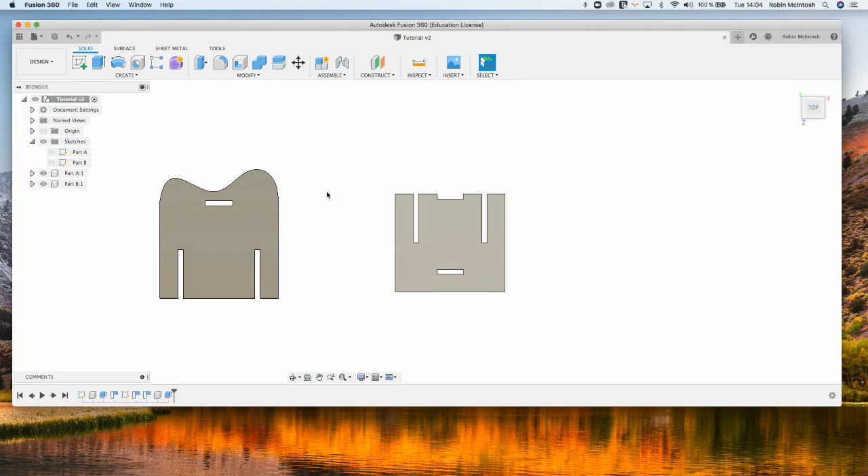So you can see here we've got part A and part B, nice and neat. We've just got two sketches that made the two parts, part A and B. If you hold down Shift on your keyboard and move two fingers on your trackpad, you can rotate this round. Now, when we look at these, hopefully you're able to see that this part here and that part there go together.

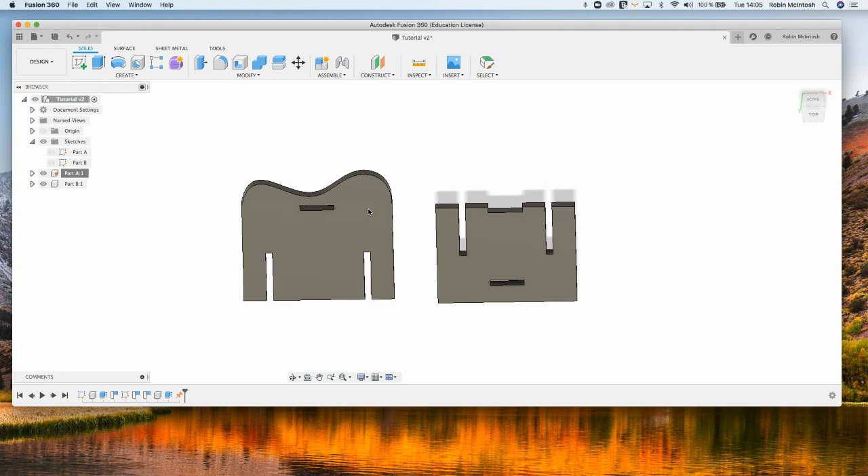So what I'm going to do is pick part A, secondary click on it, and ground that piece in space. So now I can't move that one when I click on it, but this one can still move. So we're going to move this one to join on top of there.

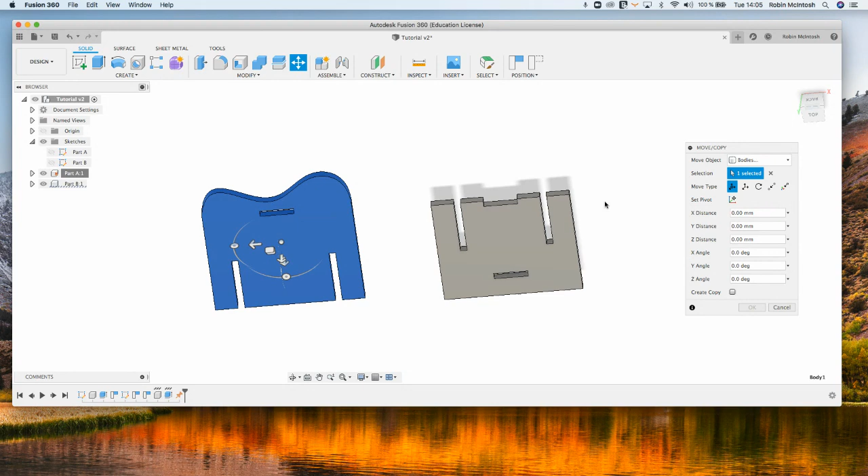Now, if you can't quite see how these are going to go together, we can rotate it so you get a better idea. So up here, we've got that move copy option. If I click on that and select this part, it's best if you select the middle. But you see, when we click on it, it's asking us to select a body, but this is no longer a body, it's a component. So we need to change that there to component and click on it again.

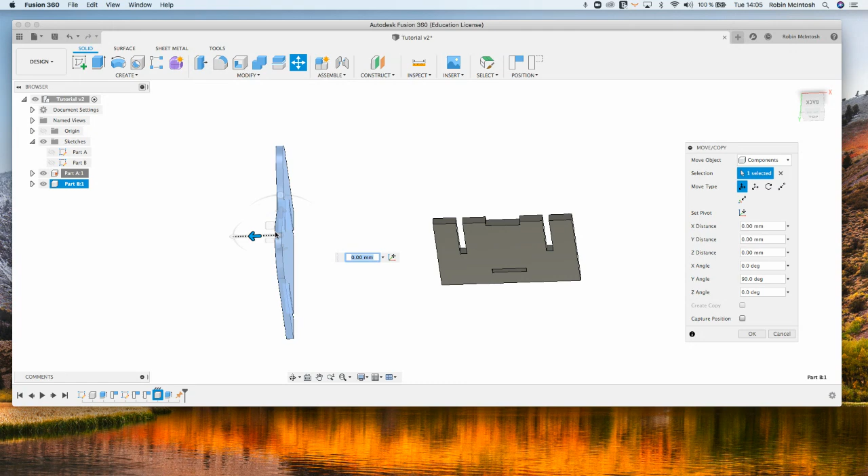So now you can see that there's these different arrows pointing with different rotations on them. This one here, I think, is the one we want. We're going to rotate that around 90 degrees and move it across a little bit. Now hopefully you can see, it's not the best angle, that this bit here is going to match up with that bit there.

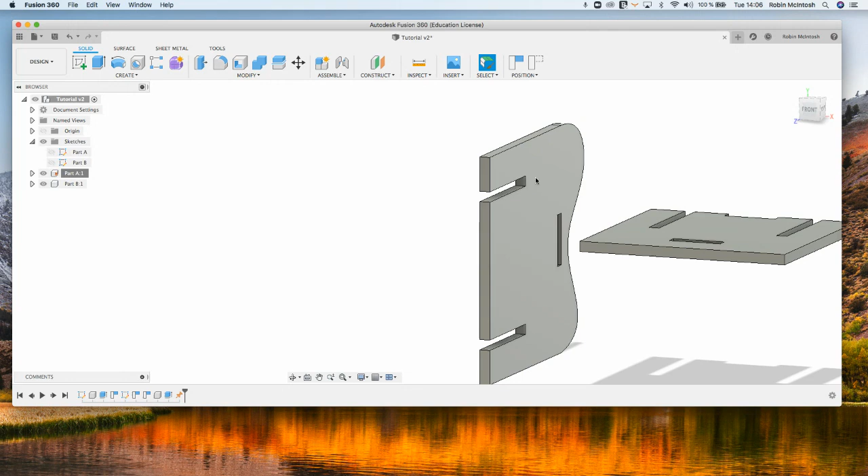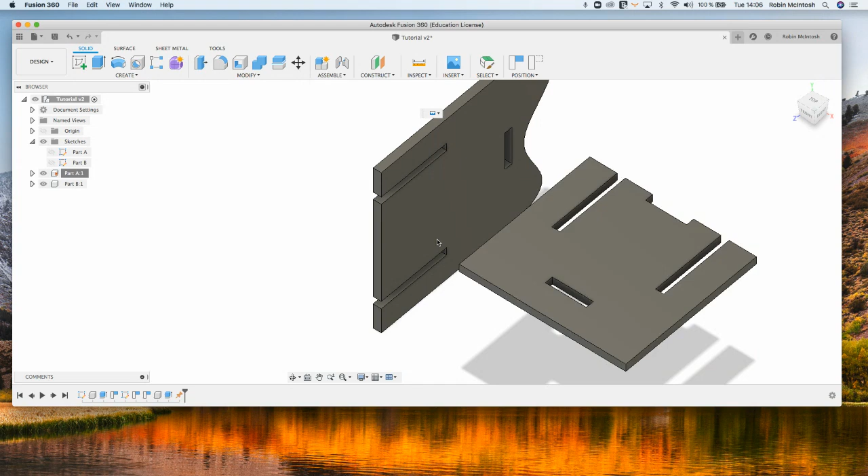Now there's many different ways that we can do this. Let me just change. I want to join the center of that square there with the center of that square there. So we're going to use the Assemble toolbar and we want to click on Joint. Now, I'm going to capture position, because if I hit continue, everything will move back to its original position where they were made. So capture position, and we've got this toolbar now.

Now you'll notice that part A has become transparent. That's because the first one you click on is the one that moves. And as this one's locked in space, we can't move it. So I'm going to rotate around a little bit more.

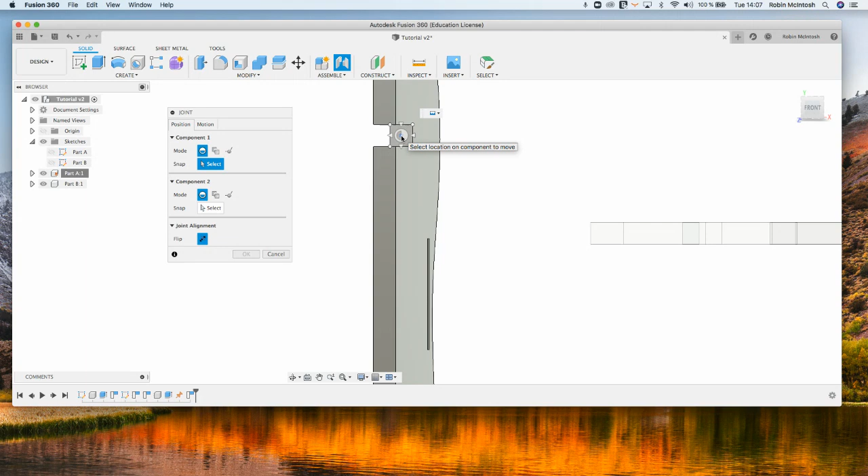And we want the center of that square there. See how that's the center there? You don't want the sides or the corners, okay? We want the center. And you'll see that if you do this quickly without zooming in, you might accidentally click on another part. So we want the center of that square there. I'm going to rotate around so I can see the center of that square there, and just zoom in using the pinch option. You see, the first thing it thought, oh, you want to join it to there. No, we want the center. And you see it moves it in, gives a little animation, and you can click OK.

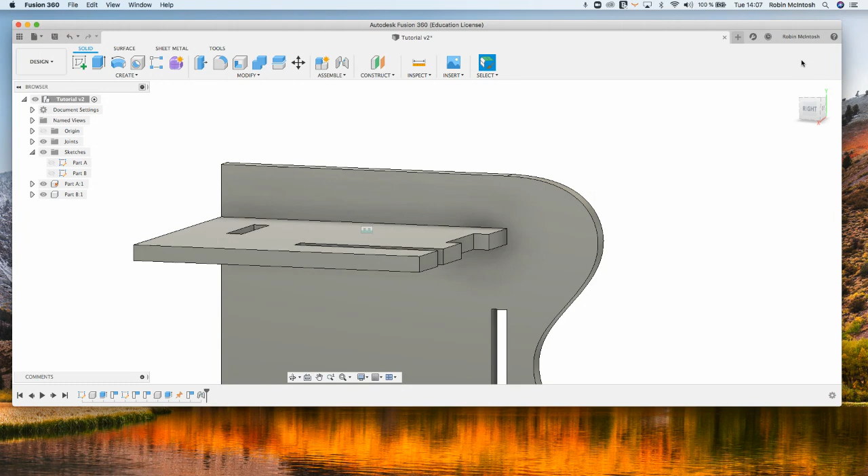Now this is where the browser becomes quite useful. In fact, I'm going to click on the house here so we can zoom out and see the thing. That is good. Okay, in the browser here, we've got tutorial. We're at version 2 just now.

We've got the joint rigid 1. You might want to name that, you don't have to. I'm going to call that cross-halving 1, because it's a cross-halving joint there. Doesn't matter, you don't need to name it, but if you had hundreds of different joints, it would be a good idea to name them.

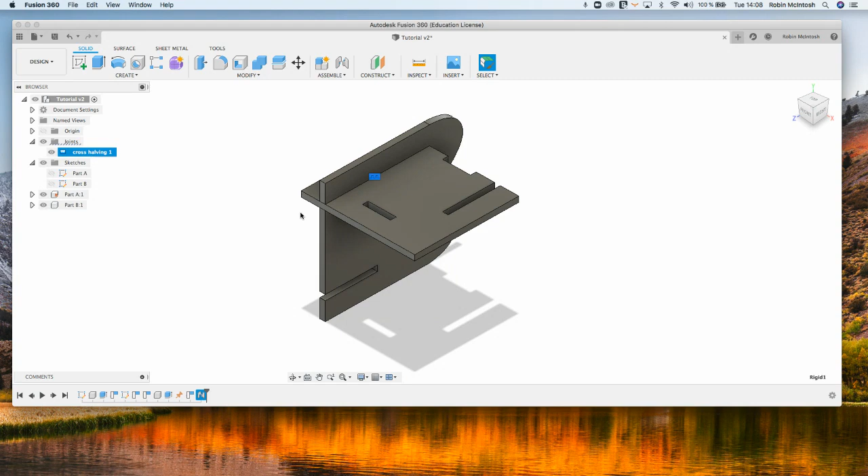Now, we need copies of these two, and for this tutorial, there's a little bit of a cheat that we can do to save us a bit of time, but it also shows you another option you have in Fusion. So if I click on that one there, you see it's selected part A, and then I click on the other one underneath, we've got the two selected. I'm just going to do Command C, Command V on my keyboard.

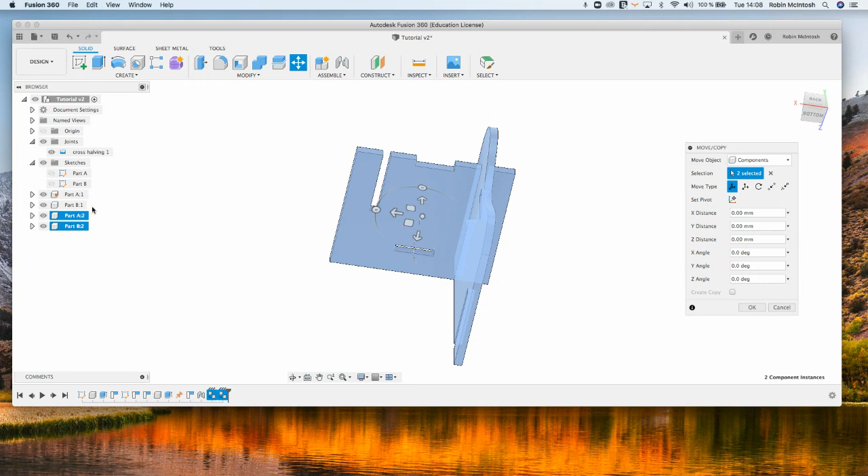And you'll see underneath it's made part A 2 and part B 2. Just going to drag them off to the side like so. Now, if I hit OK, it'll move them to there. Could have moved them any direction, it didn't really matter. Those two are an exact copy of that with the same joint, but you'll notice there's still only one joint here. So if I click on part A, it will move separately to part B, okay?

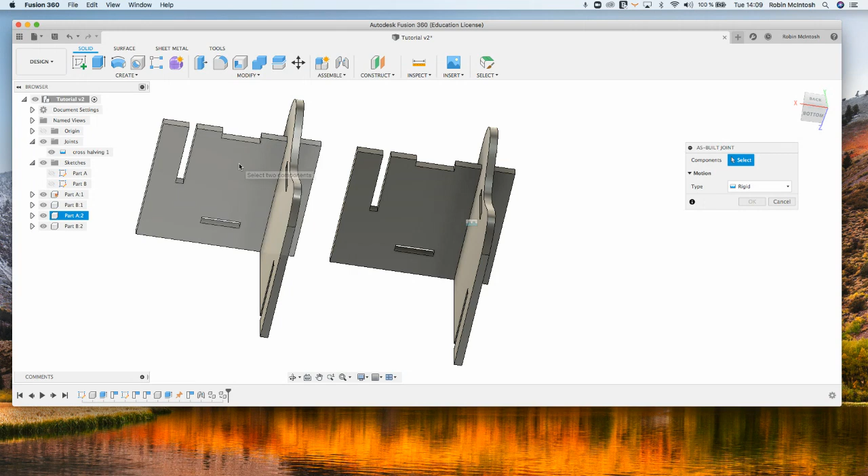Now, you could do that, but there's another option under Assemble called the As-Built joint. So what I'm going to do is click on that, and then I'm just going to click on part A there, and then part B there, and those are now joined as they were built.

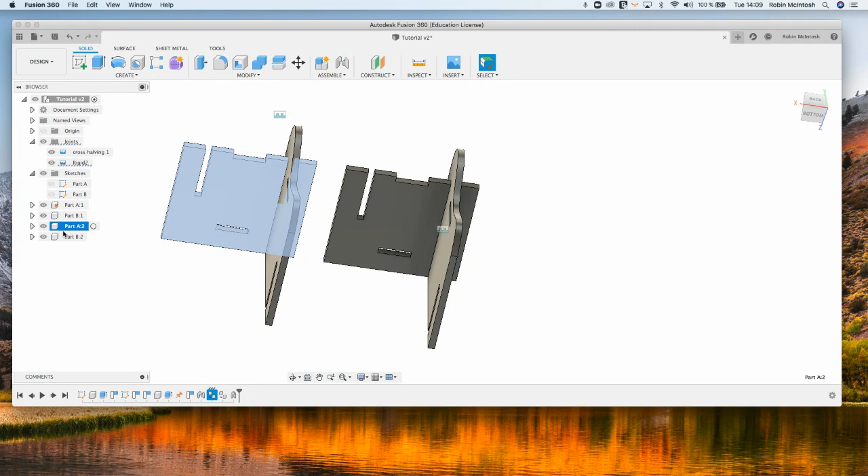Super important if you're going to do this that you do not move them, because I could have moved them separately from each other. So you have to move them whilst they're copied and pasted. If you have moved them, just select that joint, click on those two there, delete them, and do it again.

Okay, so now we want to join these two together. I'm going to go up here to move copy, make sure it's on components, click on the center of that one, rotate it around 180 degrees, like so, and join parts together again.

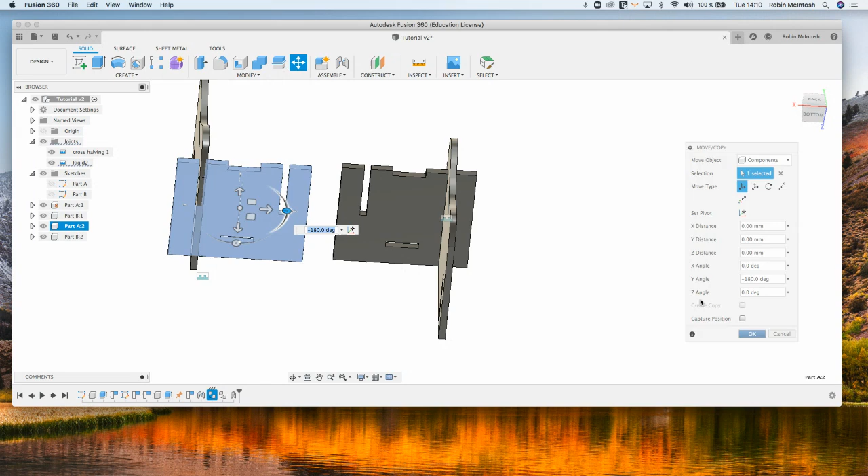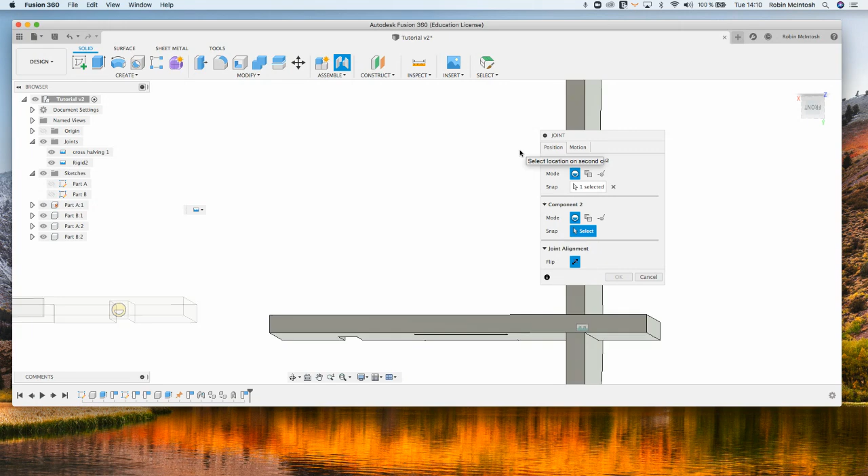I'm going to go to Assemble, Joint, Capture Position. I want the center of that square there to join the center of that square there. It looks like it's only brought one in, but watch, when I hit OK, it brings the other one in too. So I'm going to click on the house again, have a little look at that. That's pretty good. I'm okay with that.

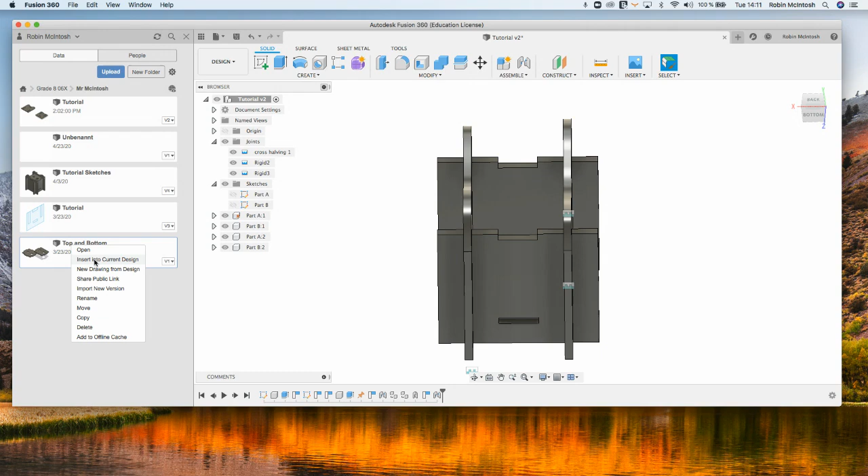Now we need to bring in the top and the bottom. Your teacher should have shared these with you. You need to go to your teacher's folder and find the file called top and bottom. Second, you click on it, insert into current design.

See, we've got these top and bottom added in again. I'm just going to go and hit save. Should always save regularly. We've got parts here, it's got a chain there, meaning it's still linked to the original document.

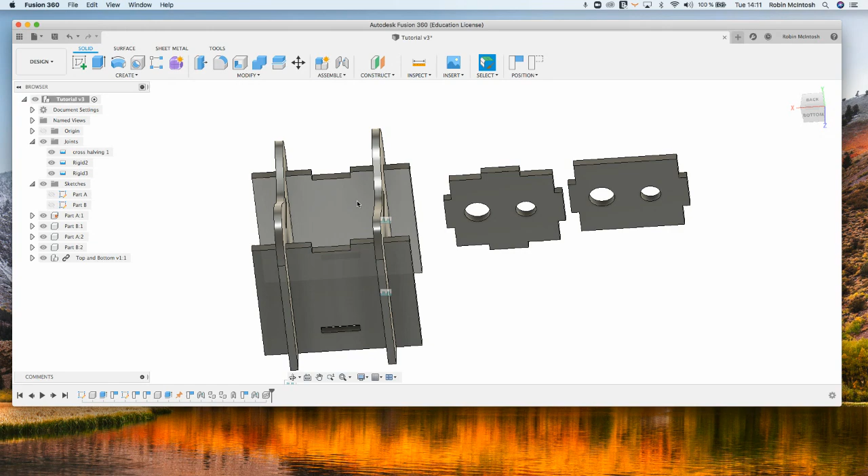So now when we're looking at this, we can see this one's got 1, 2, 3, 4 tenons on it, and if you look at the other one, it's only got 1, 2, and the bottom part has only got 2 holes. So this bit here has to be the top, and this bit has to be the bottom. Now, when I first brought them in, I could have rotated them round to get them in the right position, but I'm just going to do it now instead.

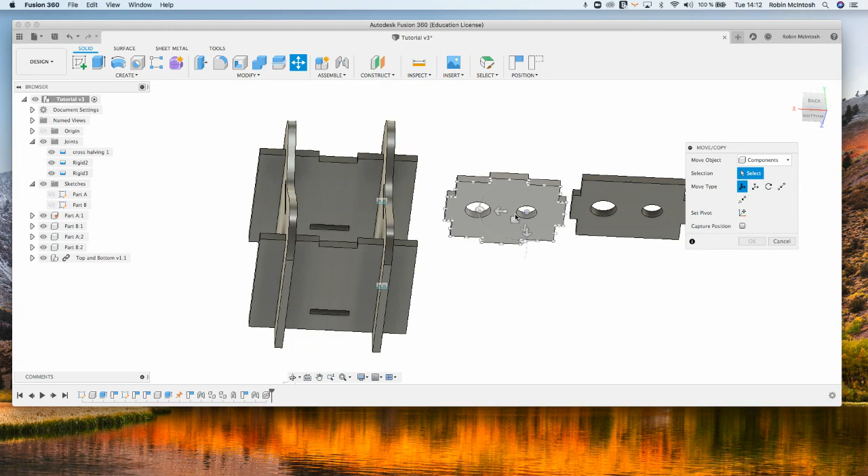So we go to move copy up here, click on that part there, make sure it's on components, click in the center, and this piece here we need to rotate around that way, 90 degrees. Now, when we're happy, click OK.

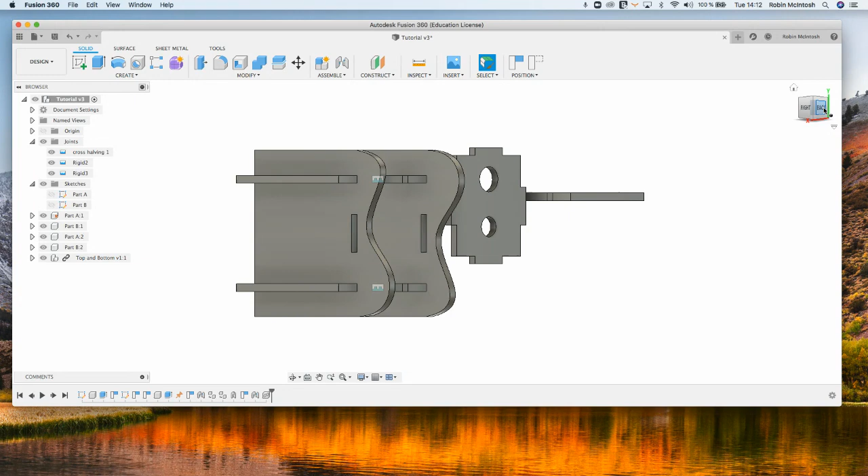Now, before, we needed to check this. So I've got that bit is going to go in here. Good, okay. Before, we did squares to squares.

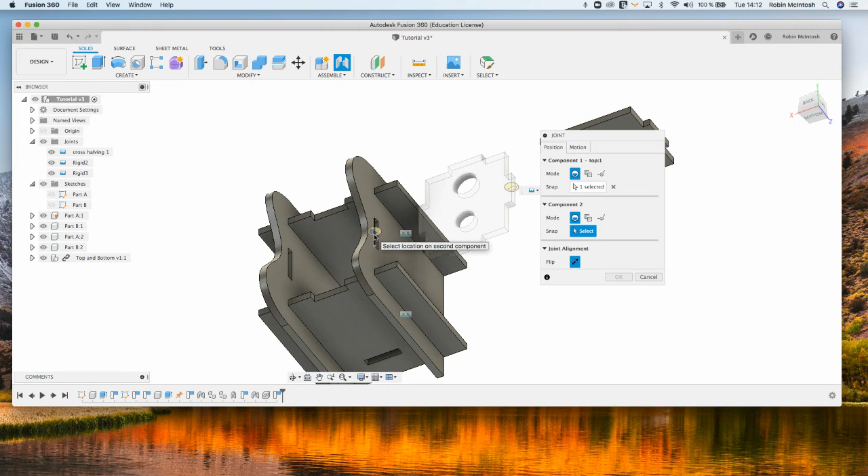This time I'm going to do a line to a line. So this top line here will match up exactly with that top line there. I go up to Assemble, Joint, Capture Position. I want the center of that line there to join with the center of that line there. And then we're okay, it's okay.

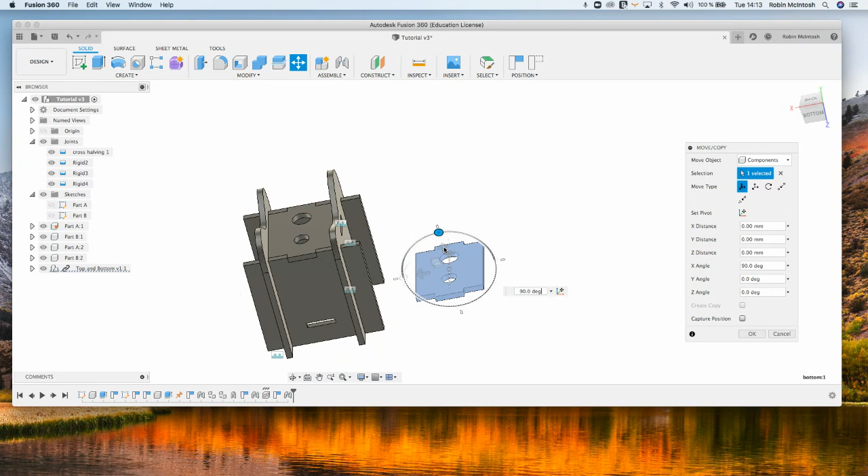And we've got to do the last bit, the base. So we're going to move that again. Show some components, click on there, and rotate that around. And then we've got to joint, capture position, from the middle point of there, middle point of there, and okay.

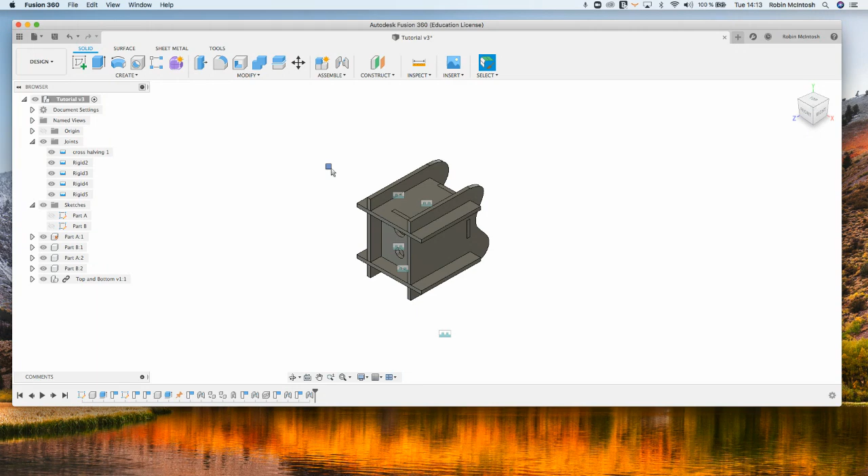Now, the last thing we want to do with your work as well is we want to make sure there's no interferences. So what we're going to do is go up to Inspect, Interference, select everything there. See, I've just clicked on them all, it says 6 selected, and we want to compute. It says there's no interferences. If you get a list of interferences, then there's something wrong with the sketches that you've done. We need to edit them.